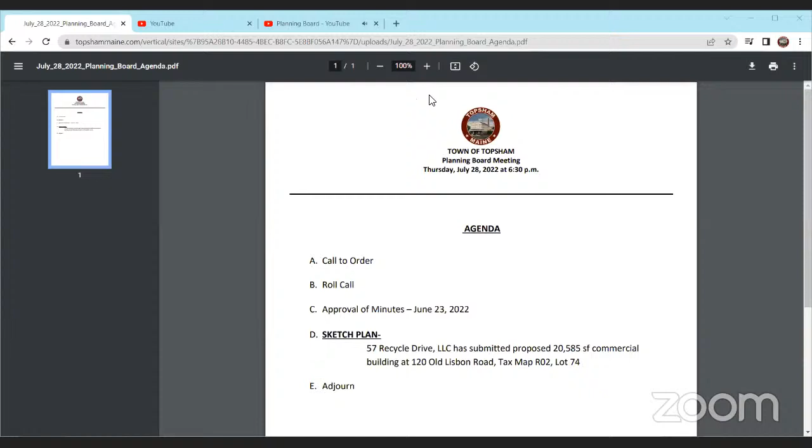So, okay, all right, so sir, if you could identify yourself and present the project. My name is Mike Gatto. I'm here tonight to represent 57 Recycle Drive LLC in this project. And if you want, I can go back and give you some history, some simple background on the history of the site, which has been extensive over the years.

I think it might be good to look at the file for the approvals, the original approvals from '13. Sure, C4, I think it is. Yep, that one's, this good one, yep. Sure, I'll just zoom into that.

So in 2000, the town approved the building on lot 1 for Coastal Metal Fab. That approval also included a DEP permit for stormwater.

In 2013, shortly after my client purchased the property, I came in and split the lot into two lots: lot 1 including the Coastal Metal Fab site, and lot 2 being the remaining land with an access road running from Lisbon Road to the former Maine Central Railroad location.

We were headed towards getting access to Grimmel Industries, which is down along the river, whose sole access was through Pejepscot Village Main Street. That had caused a lot of problems in the town over the years.

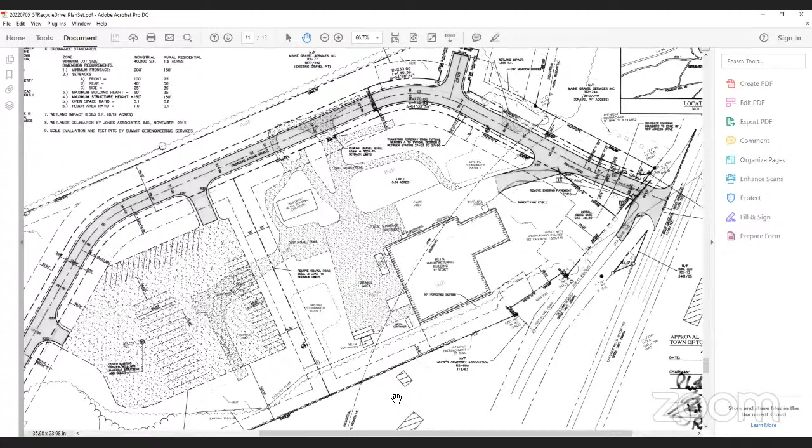So we got this project approved as the first step with the gravel pad that you see at the corner of your property, where we were going to park the Grimmel vehicles and containers so that we could operate 24/7, where Pejepscot Village Main Street was controlled access only from 7 a.m. to 7 p.m.

At the time we got this approval, we also designed the stormwater pond for that gravel pad, as well as a building across the road from the gravel pad on what is now lot 3 that we're looking for approvals tonight. So we got approvals for this back in 2013.

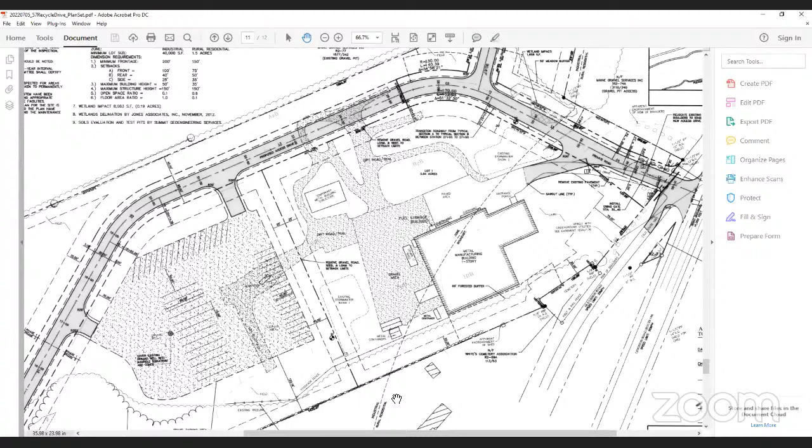So can you slide that over and just show that? Yeah, so it's across the road, where the detention pond is down by the railroad tracks.

And that approval included, like I said, the gravel pad from the town, a site plan approval from the town, and we got a DEP permit for 8,083 square feet of wetland, all done in 2013.

Shortly after getting those approvals, we began working on the lower access road. And if you could go to the file that says - it's the last file in the folder that says rail cover? Yeah, rail cover.

So if you look at this up in the top right-hand corner, you're going to see lot 1, and you're going to see our access road coming in. And that top parcel is the FCM property that was done in '13.

In their ultimate wisdom, DEP said if we were going to run an access road from there, the railroad tracks down to the Grimmel Industry site, we were going to be a common scheme of development, and we would have to file for a Site Location of Development Act permit. Because it was over 7 acres, it was something that had to be processed at the DEP level.

So after working with them from '13 to '14, in the fall of '14, we filed a permit to actually convert the gravel pad that we had gotten approved in '13, which is shown here as a 56,000 square foot building. Yeah, right there, yeah.

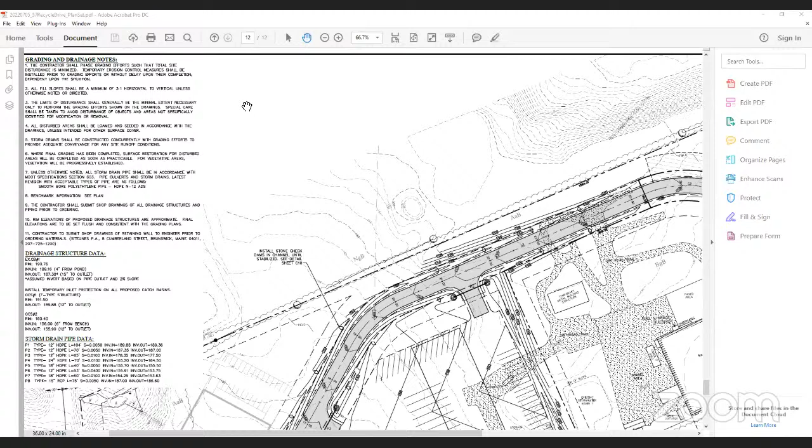So if you want to go to the site plan, we can talk a little bit about the project. Let me just open it up, right from here, drive.

So basically, coming down Recycle Drive, the first thing you'd come to on the right would be the parking area for the employees with 2 drive-in doors at an upper level.

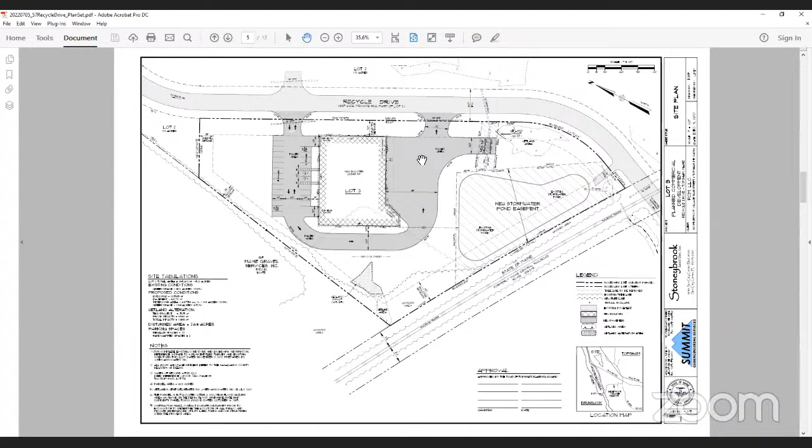Then there's a road that circles down around the back to 4 loading docks. Again, it's designed for 2 tenants, so the trucks will come in on the upper level, leave at the lower level, circulate back into the loading docks, and then leave the site.

We're not proposing any site lighting except lighting on the building. There is no street lighting proposed.

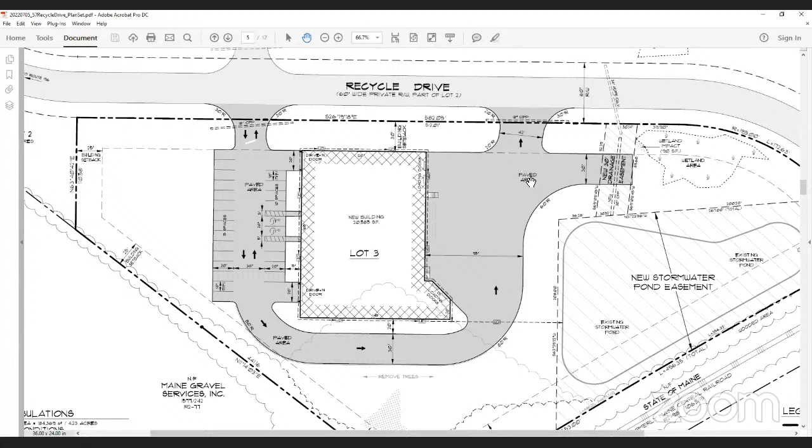So if you would orient everybody - 196 is to the left, out of the site. The railroad tracks butt us, we butt the railroad.

I just wanted everybody to understand. There is an easement on the plan for the detention pond, which is shared by the remainder of lot 2, and the road is treated in that pond.

That pond was designed for a building of similar size. What I'm proposing here is about 8,000 square feet of total impervious, more than what was designed for this part of the lot. What I'm talking with Tom Socher about is allowing this to get built because there's nothing on lot 2 that was designed as well.

When we do the building on lot 2, we'll make sure it's equal, or we'll modify the pond if it needs to be modified at that time. Obviously, you folks are going to hear that from them, and that'll come down to his final review comments.

We've sent an email off to DEP asking for the town to do the Site Law modification and stormwater approvals. We've given an escrow check to the town so that Tom Socher could be on board. We walked the site earlier this week.

That's the short story. We are looking at waivers, and when you're ready, we can talk about that. And I gave you - go back to the aerial.

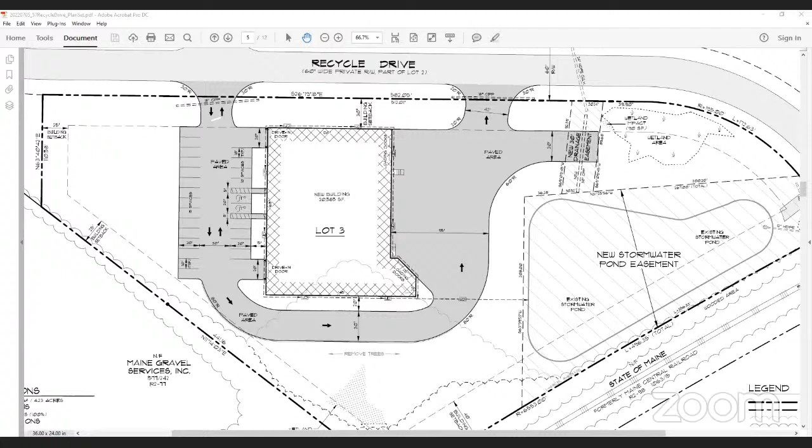If there's any issues with erosion at this point, obviously it'd be more apparent later. Tom inspected it on Tuesday, but he didn't make any comments about that. I made a note where it talks about the stormwater flow, where I thought we need to have a peer review. Yeah, and we've got Tom under contract to do that, I believe. He did a site visit on Tuesday and we're waiting on the DEP correspondence, but he will be doing the delegated review.

We've also filed a wetland permit already to do an additional 1,415 square feet, which will bring the total wetland impacts on the combined properties to 11,398 square feet. So we're still a tier 1 at this point, and we're monitoring that as we go through it. So we have the building still, yes.

My other question is just really about clarifying the way it was. So anything on the lot, and we'll talk about the building. I'm trying to get clarification of what part of this whole big area of land was approved for the commercial development. The whole thing? Just this piece, just this piece.

Just this one piece of 20 acres. It's this outlined piece, right, Mike? Just that outline. Yeah, it's lot 1 and 2, but there is another plan. Okay, yeah, there is the, right here.

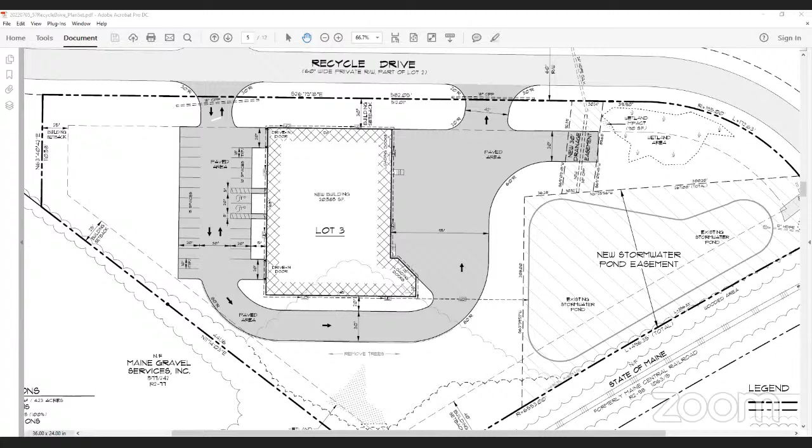Is it sheet C4, Mike? Here's the C4, yes. Not the grading, that's grading. Great, I have it in the other tab. This is what's there. Yep, this is yet to be developed. It's just a big file. All right, hold on, double.

Files. This is lot 3, the one we just discussed, and that's the only part of this right now. This actually shows a little bit cleaner, but that's what we're talking about. And that's when I try to orient it. I think you just had it, didn't you? Yeah, when I said here, right?

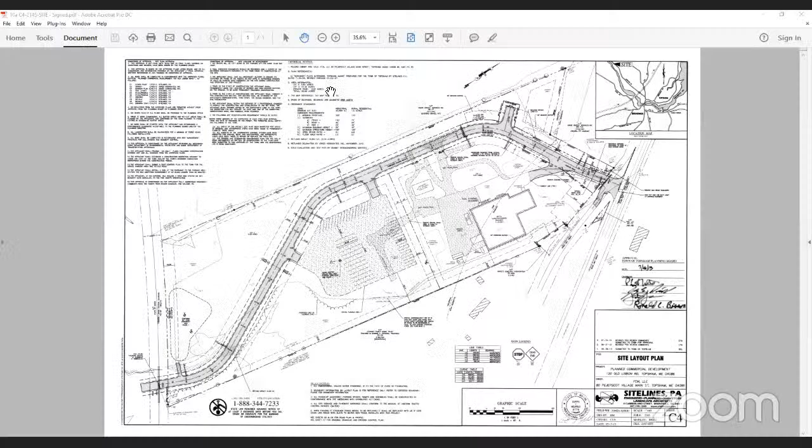So I've actually been down these, second floor. Okay, yeah, so familiar with it. Yeah, there's the planned commercial development that was approved right there. So setbacks on both sides of Recycle Drive were installed at that time. Really the only thing that was approved with the planned commercial development, because no buildings were proposed, was the setback reductions and the gravel pad. So we really didn't talk about buildings at the time - we didn't have any buildings.

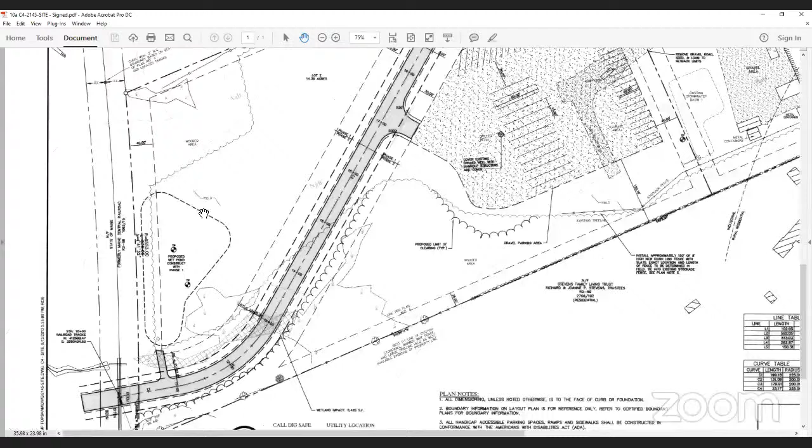You can point out the retention ponds we're talking about. Yeah, this one, right there. And then the ones up top - I've got another one up here, right? Yeah, Mike, there's one there, and then there's one up by the road. Right there, yep. And then there's buffers which don't show up well on this plan - there's buffers off the end of the building, and there's buffers along the north side of the road, on Recycle Drive. No buffers that have grown in yet.

So I guess the top building needs a waiver. Bring up the building. Take single story - what's that? Single story. Single story, it could have a mezzanine in it, because it'll be tall. It's a tall building.

All right, Mike, I'm just trying to bring it up. It is labeled - I think right there, stamp set. Yeah, yep, you have to, okay, scan down through. Yep, keep going. Okay, those are the elevations - is that the elevations you want to see? Yeah, yeah.

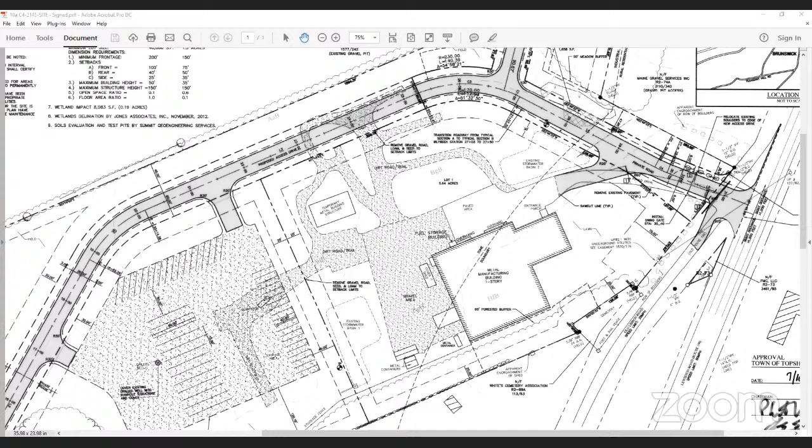So at this point, it's kind of a flexible use, flexible use, industrial, probably most likely industrial, some sort of industrial use. Doesn't look like the inside of the buildings is partitioned. No, I think we put 2 bathrooms in it, but I think that's, yeah.

I know it's an industrial area, obviously, but did you consider instead of a flat roof, a pitch roof like the Dempster building? No - a 30-year rubber roof on the Murox buildings that they're proposing is less maintenance and less problems.

So this developer has chosen that Murox type style building. It's better insulated, and the flat roof, 30-year rubber roof, is something that's proven - his best friend has projects in Lewiston with 25 or so buildings where maintenance is very minimal. So it's a prefabricated type.

It's prefabricated, it comes in panels. So this building will go up with all walls going up with doors, windows, and openings all there - they'll go up in 2 or 3 days. So it's a panelized building. The structure is within the panels, and then the roof ties to the panels.

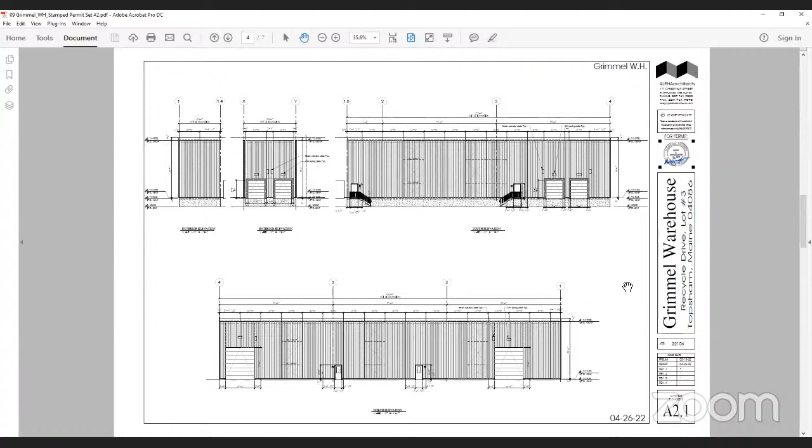If you go down a few more sheets, you might get a sense of that from the Murox plans that are in there. And what was that height? Can't read - can you zoom in on this? Yeah, 28 feet, is it? 28, yeah.

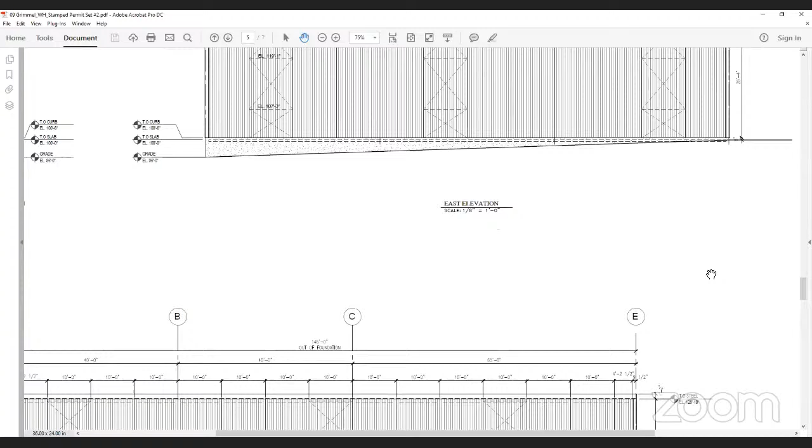So you can see, I think this is a Murox plan. You can see the 10-foot panels, and every now and then there's cross bracing, depending on what wall it's on, and so on and so forth.

Since this was well off of 196, where these buildings are going, and since it was going into this private lot, we chose to go with the more efficient building rather than adding pitches and the other stuff. The commercial standard buildings don't require pitch roof funds, not in the industrial zone. The architectural design standards do not apply to this district.

And I'm assuming, because there's no partition walls, the building is being designed as an open concept, and then you can kind of customize the interior based on the tenant that you guys get.

Yeah, what happens is they'll build the outside shell, and they may or may not pour the slab inside. All the windows, doors, everything will be there. Plumbing will be stubbed up to the floor. And once they get the first tenant, then they'll finish the floor off and build it from there. And the tenant in Lewiston, the person that does a lot of these buildings, he's modified those buildings multiple times and had 50,000 square foot buildings occupied by 5 or 6 tenants, and then take the partition walls out all at one time. So it's quite flexible because it's clear span for the most part.

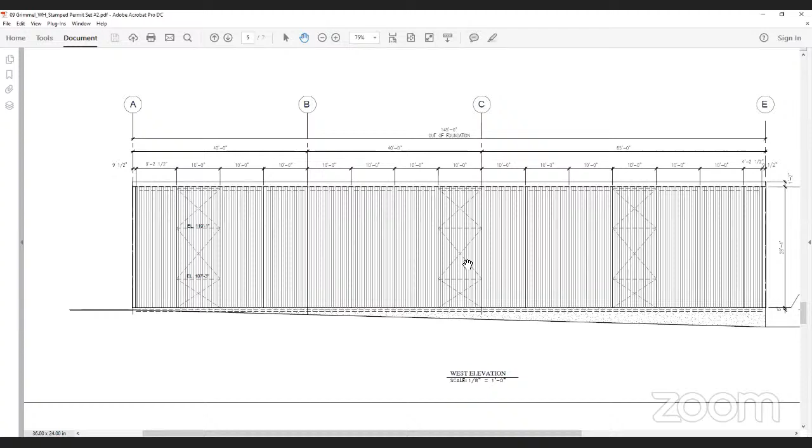Go ahead with the waiver discussion. Well, the waivers come down to your additional standards for lighting, landscaping, and the general parking. We're not necessarily following in our design many of those, for section 175-9, additional lighting, section 175-10, additional landscaping, and section 175-12, general parking. We have parking on the side, not in the back.

There's just a lot of those standards. And as I looked through it over the last couple of days, I was looking to waive the landscaping standards, looking to waive the general parking standards, and looking to waive most of the lighting except for item A, which has 6 criteria. But that's what I'm looking for from my client. That's fully in your hands, but I wanted to talk with you before I worked on drafting the waiver request.

It would be good to know exactly why we have these requested. On some of these, especially 10 and 12, the full section does not apply to the industrial zone. It's pretty limited what does apply to the industrial zone for a good reason, because we don't. And that's, I wasn't sure. I don't think the side parking is.